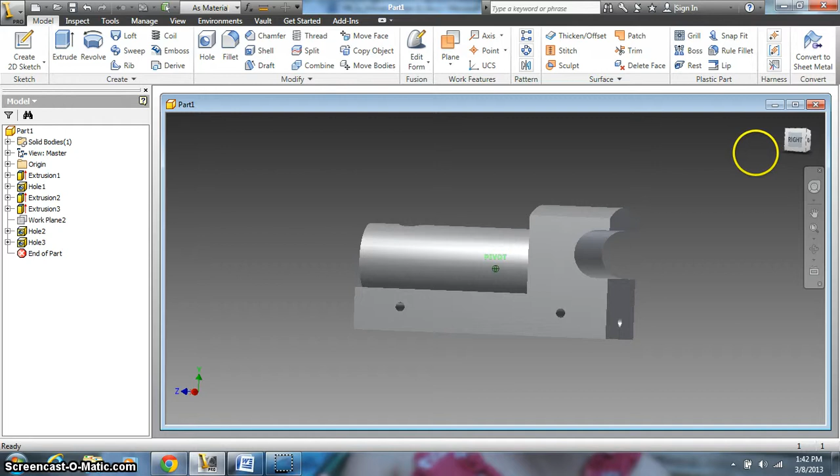Let's go ahead and hit OK. As we turn, we can see those holes in place. I'm going to go ahead and switch to the back side.

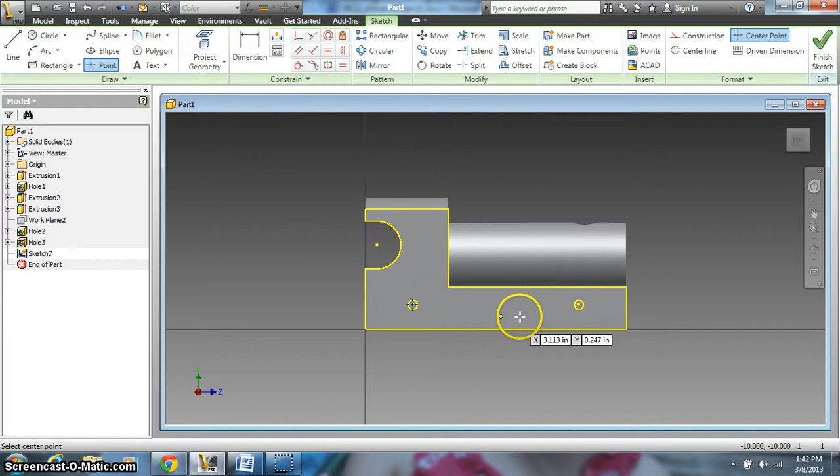I'm going to use a tool called Project Geometry. Place a sketch on this face. Project Geometry means find other geometry as your part of your model and bring it onto the sketch and use it as a place marker. I can locate the circle for that axle and click on it, and somewhere over here is the other one. Once I've done that, I can place a point at the center of each of those.

And then I can finish my sketch. Now I've got those to use. Go right back to my hole tool. My distance, 0.875, 0.75, 1/4, 20 UNC. Hit OK. Tilt it a little bit, and they're good to go.

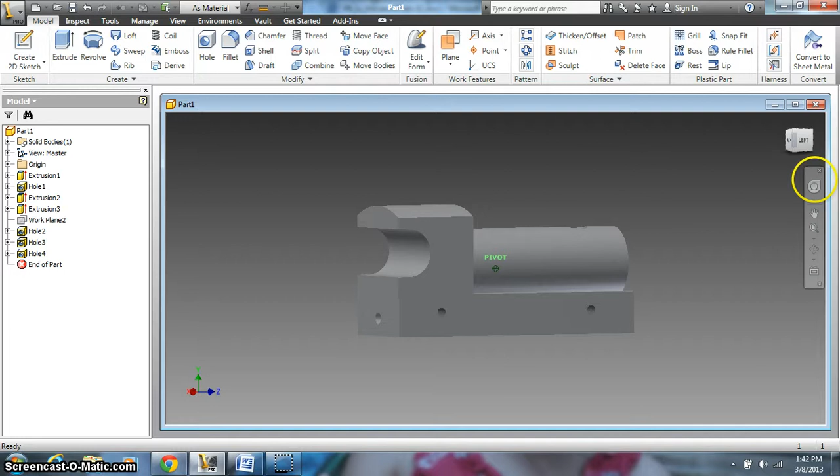Alright, we've got the hole in the back. We've got both axle holes. We've got the chimney hole. Let's look at the front side of this guy. We've got 3 holes to put in place.

This hole has a designated arrow leader coming off of it. They are a diameter of 0.125, a depth also of 0.125, and there's 3 of them. The little anchor symbol tells you how deep the hole is.

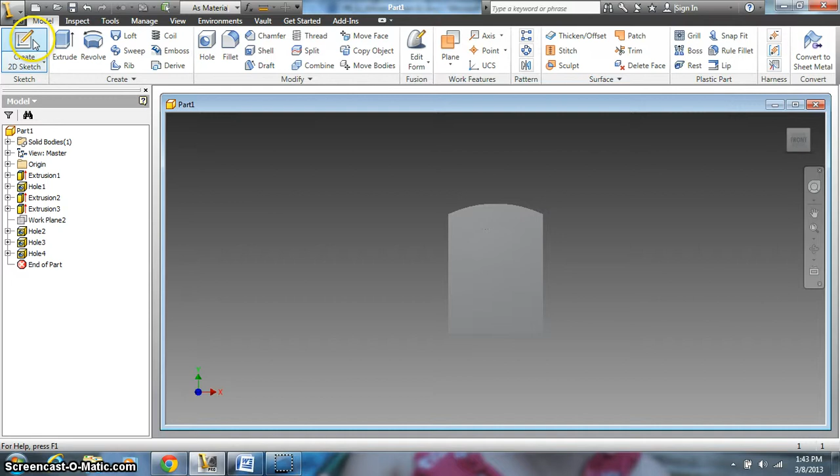So I can begin to look at how far apart these holes are, how tall they are, and where they belong. First thing I'm going to do is go ahead back in here. I'm going to create sketch, and I'm going to put it just on the front of the train, not the back, the front. Once that's there, I can drop some points in. To look back at my reference, there's 2 here. And I'm going to draw a straight line so those are locked together. And then put one up here.

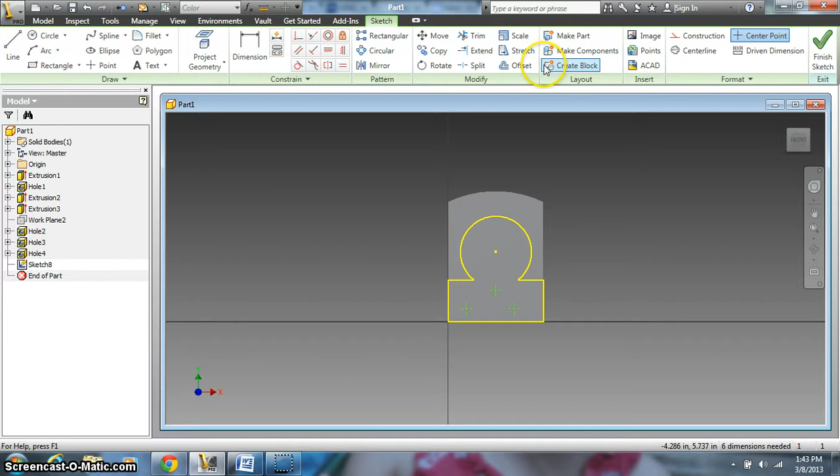I'm going to try and center it. Alright, it's kind of hard to see, but the next thing I want to do, maybe home view would be better, is start dimensioning these.

So this hole right here looks like it is 0.125 off the bottom. So let's go ahead and put that on there. Dimension distance from here to there, 0.125, and then here to the bottom, I'm going to pick that guy, and I got it. Now those are both equal. The distance from the center of this hole to the bottom is 0.625, right there.

Dimension 0.625. And then the distance that this hole is from the left is 0.375, right there.

And the last one is 1.625 from the left side. Here to there. Let me just check that one more time. 1.625. That has that in the right place.

Their height is correct, their distance apart is correct, and the height of this guy is correct, and he was centered. And I can check that and verify that if I go in here to here, and that's a 1. I'm going to hit escape and not use it. Let's look at the front view again. That looks pretty solid. I like that.

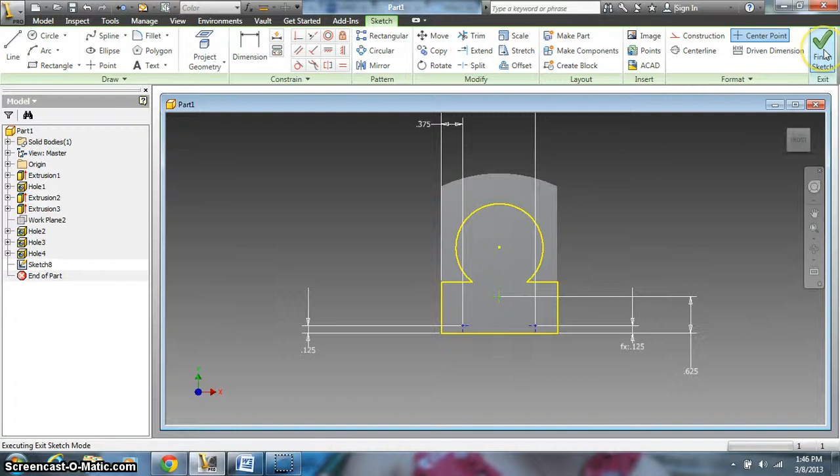Finish my sketch. Hole feature. All three are chosen. Let's read the note. Quarter diameter, I'm sorry, 1/8 inch diameter, 1/8 inch deep, pointed holes. All holes are drilled with point angles. So what does that mean?

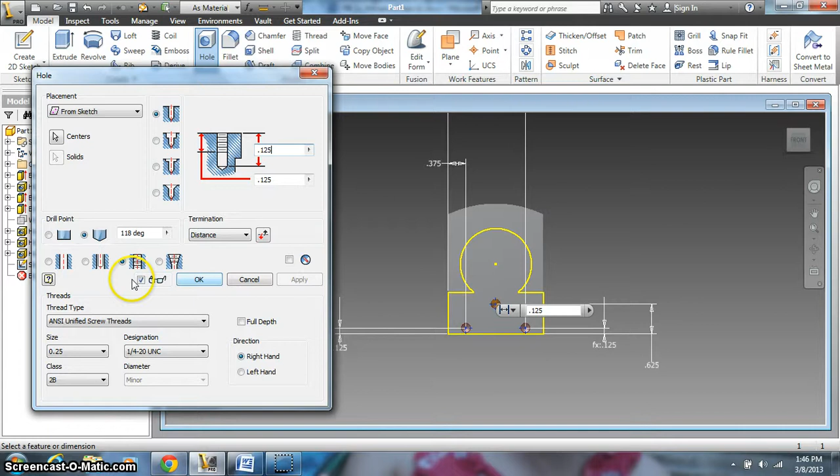Pointed hole, diameter 0.125, distance also 0.125, and we are good to go. Oh sorry, this should be a simple hole. Diameter changed on me. And that's everything.

Twist it and you can see the holes on the side. Now I think, looking back here, that is everything we need to complete this training.

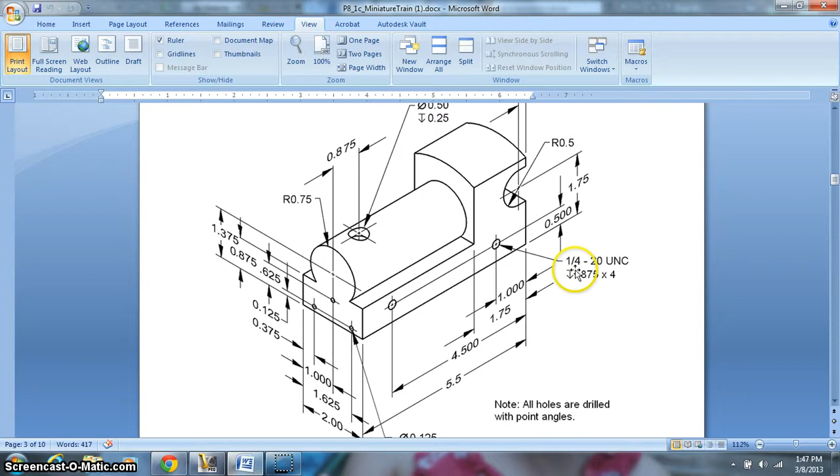Remember, start to realize what these stand for. Quarter 20 needs a threaded hole, like for a bolt. When you change quarter to 0.25 on your size, you're going to get a designation for this type of threaded hole. The arrow symbol means depth, times 4 means there's 4 of them, 2 that are seen and 2 that are not seen on the other side. Same thing up here, and here's a note for all the other holes, meaning these ones in the front.